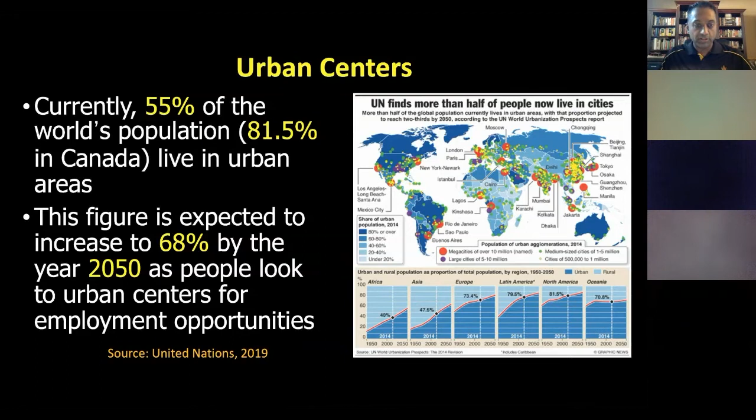When we look at urban infrastructure, where we are today took about 5,000 years, and we're expected to double this infrastructure over the next 35 to 40 years through construction. And from a design perspective, these systems minimally need to last more than 50 years. So we have to be creative in terms of how we do that. Today I'm talking about trenchless technologies and underground infrastructure, utilities, those types of things. A lot of our systems are aging. We have old pipes, a lot of places where we've got cast iron pipe that we're changing over to ductile iron pipe. We've got a lot of concrete and clay pipe in various stages of their life cycle, and we need to upgrade all of those.

Not only that, but we have capacity issues, and so trenchless technologies like pipe bursting are very important to be able to upsize the capacity. When we build a new subdivision and tie it into an existing system, it can't handle that kind of waste. So we need to upsize those and build new ones.

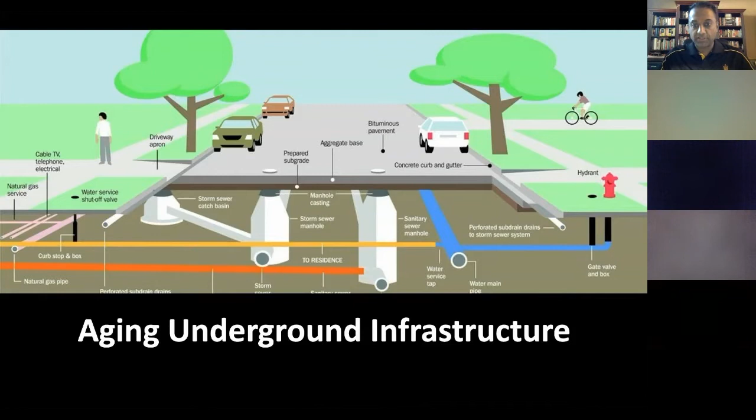And so what do we look at? There are a lot of owners out there, and from an owner perspective, you're looking at, is it economically viable? What does it cost? Can we do that? We look at natural resource conservation these days, more and more at the whole aspect of sustainability, and whether these technologies will be better on our natural resources. The social responsibilities as well, making sure that we have minimal disruption to surface activities and the general public, which is paramount in any kind of application. And then when it's operational, what is our efficiency in the operation of those systems? The process, the technologies, the people involved, how does it work?

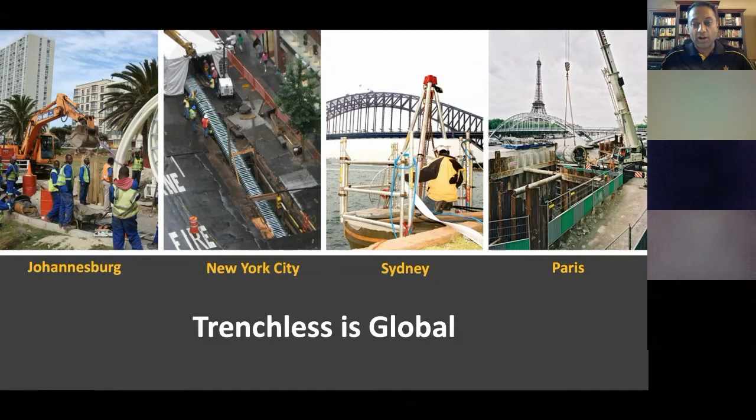And trenchless really has a global following. We're not just using it in Canada and the US, it's all over the world. When I was chair of the International Society, I oversaw trenchless activities in 40 different countries, and I spent half my time on United Airlines, traveling to many places to talk to governments and see what they're doing. This is just a snapshot of the global aspects of it. You can look at Johannesburg, South Africa. This is New York, Madison Avenue, doing a lining job. Sydney, Australia, and of course Paris, with the iconic Eiffel Tower in the background, is a microtunneling project across the Seine River.

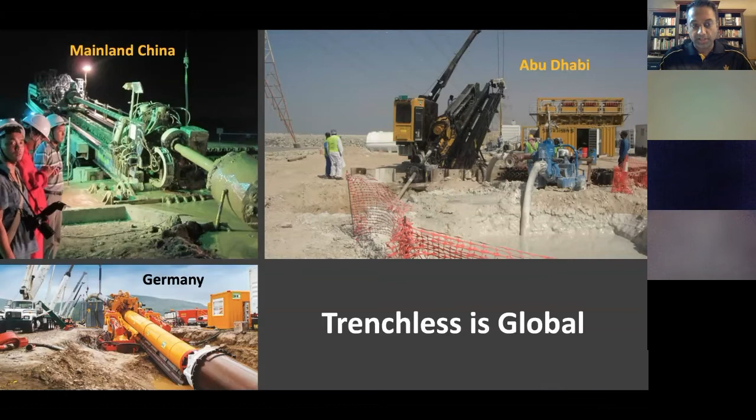Mainland China. So that picture of mainland China is a rig from China National Petroleum, and they did a 3.3 kilometer shot, not just one, but three 3.3 kilometer shots beside each other underneath the Yangtze River for oil and natural gas type products. So both of them. Abu Dhabi. Sometimes we're doing trenchless in the middle of the desert, and then Germany with this direct pipe. And I understand you'll be talking about direct pipe, which has really become more and more popular as a tool in the trenchless toolbox.

Well, as we all know, today we're in the world of COVID, and so we have to take precautions. And so where are we with trenchless with COVID? Well, I can tell you that as much as COVID has been a very negative from a health and a human aspect, one of the things that has come out is that we're doing a lot more remote working, and our kids are in school remotely. My kids at Arizona State University, I do teach live, but I have maybe 1 or 2 students that'll show up to class, and the rest of them are all remotely.

But we found that there's a lack of our IT infrastructure, and you see a lot of directional drills and trenchless applications for installing new telecom systems. Our 5G, it's a big race, and I can drive outside today, and I'll probably see 3 or 4 horizontal directional drilling rigs here in the Phoenix area that are putting in telecom systems to upgrade that infrastructure for telecommunications. But trenchless has been a boom.

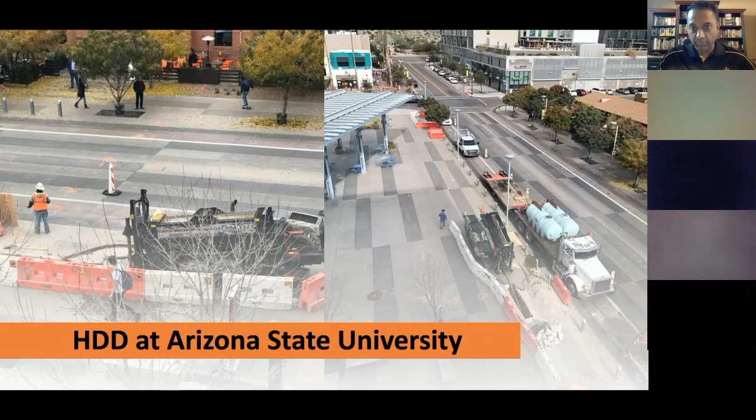This is a telecom. This was before COVID, and this is looking outside of my building at the university, and you can see they're installing Cox communication systems around campus and around the area. And you can see how minimal the disruption is with HDD. And so universities and public institutions are doing a lot of trenchless. We do lining on campuses and things like that as well.

And I actually arranged a trip for congressional staffers from the US government to come out one day. I flew out to DC and we talked about this so that at least Congress can understand more about directional drilling and trenchless, and how trenchless as a whole has a lot of benefits to society, because there's still a lot of people that don't really understand trenchless technologies and how these can really help with infrastructure and make life a lot easier.

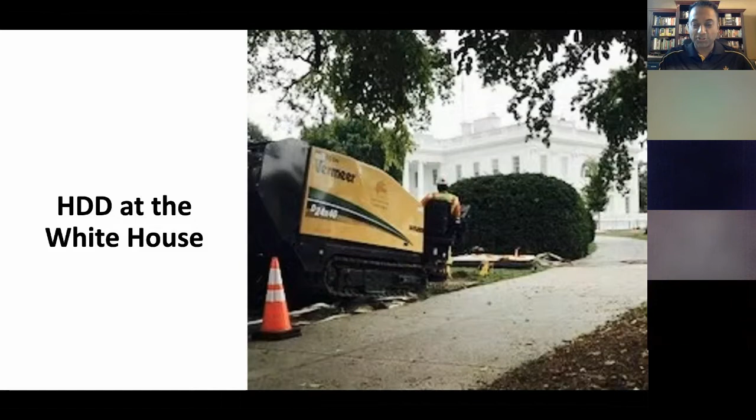But, we use it all over. I guess we have this election coming up, but this is an HDD project right at the White House where President Trump lives. And we do use these in all different situations. So I thought this was kind of an interesting picture. I can't really tell you what the application is, it's all secretive, but interesting projects as well.

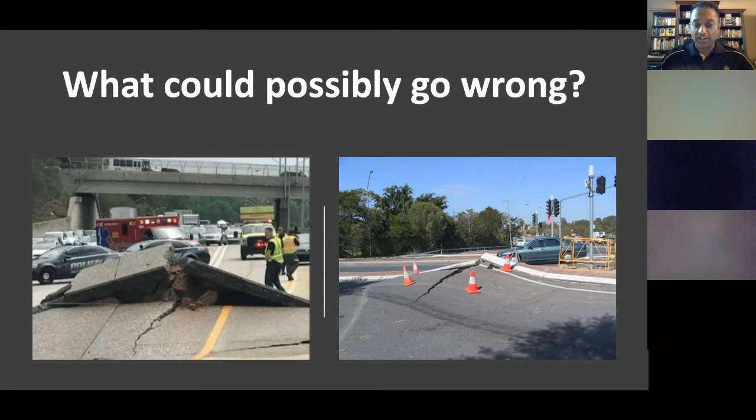Well, what can possibly go wrong? I mean, trenchless, what can happen? Well, these are all pictures of inadvertent returns or hydrofractures that have occurred with horizontal directional drilling. It's underneath a road, and all of a sudden you have a release of drilling fluids, and this can happen. So proper design, proper construction practices can really avoid this, because this is a litigation just waiting to happen right here. And so, is it the design? Is it the way the contractor drilled? What is it that could have happened right there?

I can't stress enough in any of trenchless, and this is related to horizontal directional drilling, but soils investigations obviously are where we need to start with any kind of trenchless operations. And I preach to a lot of owners and engineers that it's so critical to have that information even at the design stage, to know what depth should we be designing it to?

Should we get out of cobbles and gravels if we're doing HDD, get out of rock if we're doing pipe ramming? What kind of soil conditions are really appropriate for whatever trenchless method we're doing? And so having enough soil borings is really critical, or doing other types of investigations. We do geophysical investigations, many different things that could be applicable.

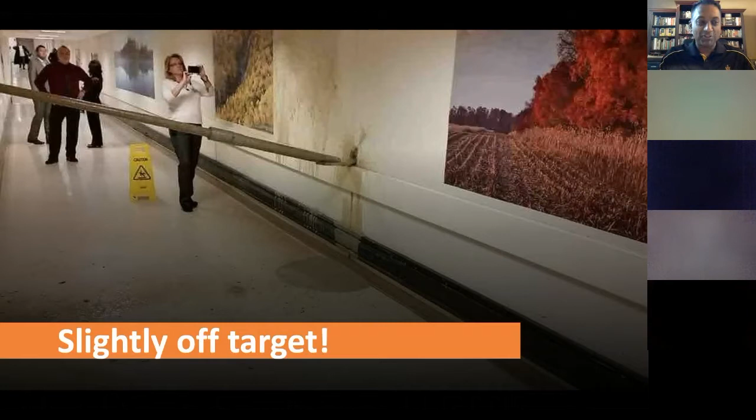Striking of utilities, and what gets a lot of attention are natural gas lines. When you hit a natural gas line, and I'm actually involved in most of the natural gas explosions that happen in the United States. I represent the gas industry, so I work with a lot of different gas companies.

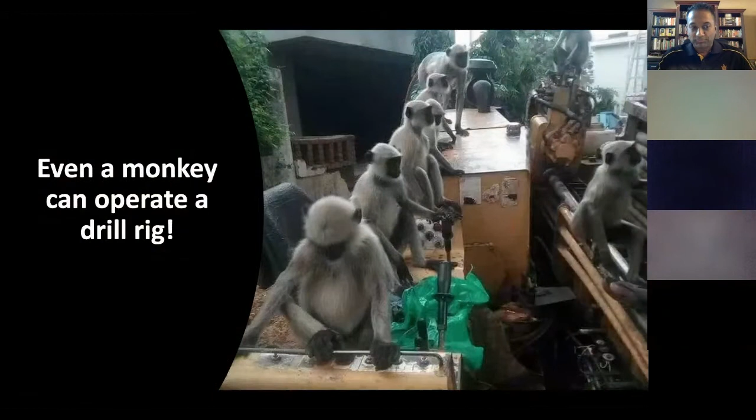So, can even a monkey operate a directional drill rig? Absolutely not. It's not the case of just anybody jumping on a rig or any piece of trenchless equipment. I focus on directional drilling because that's what I do most of my education and research on, HDD technologies. But you can apply that to any trenchless method. You can't just jump on a machine and start operating it.

Just like you can turn on a car, but if you don't know the rules of the road, you can't drive a car, right? My 12-year-old son can turn on a car, but he can't drive. And if anyone's interested, this picture was taken in Thailand of a bunch of monkeys that were curious of what this yellow thing was in the middle of their area.

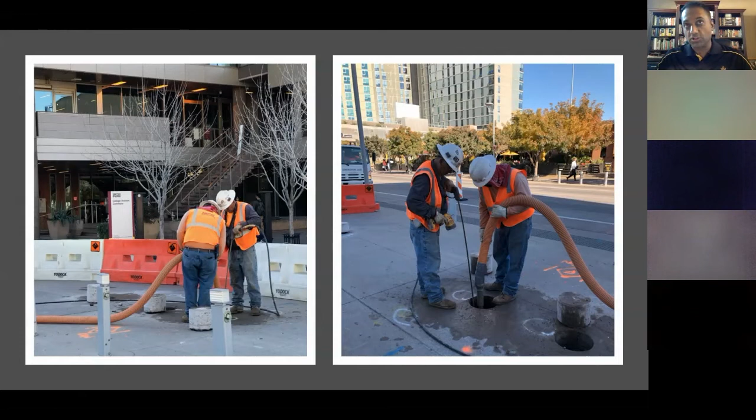I think it's also a good idea as design engineers to have these utilities located prior to your design, because then you know exactly where those utilities are and you can do a better and more competent design. What you don't want to happen is you just design a line and then put it out to bid. Contractor gets out there, they're doing the utility locates, and they find out that the design is intersecting or too close to some existing utility. So doing all that as part of the pre-construction or pre-design aspects can really be good to do as well.

So as a designer, you've got to understand doing your calculations, whether it's pull loads for horizontal directional drilling or jacking loads for microtunneling or any kind of jacking operation, your IRs or your inadvertent returns. You can do these, we call them frac out calculations. You can calculate your maximum allowable downhole pressures based on your soil conditions and your depths and your diameters and all of those types of things. And also looking at your minimum bend radius, from a designer perspective.

From a geotechnical engineering perspective, I've been on plenty of projects where they use geophysical surveys as well as soil borings, critical projects where you want to make sure that you have as much information of what's underground. And when you're doing those soil borings, and unfortunately I've seen them, if you're 20 meters deep, you don't want to do a soil boring that's 10 meters. You've got to go to that plus some, right? So we always recommend you exceed whatever the design depth is. But unfortunately, I do see that happening where they fall short of the design depth, and things can change a lot in those soil lenses as well.

Geologists I put in there, and geologists can provide a very interesting perspective of the history of the area. Some of you might be geologists, but you really understand how things were formed through volcanic shifting of the area, and that can really give you some other information on what the area was like.

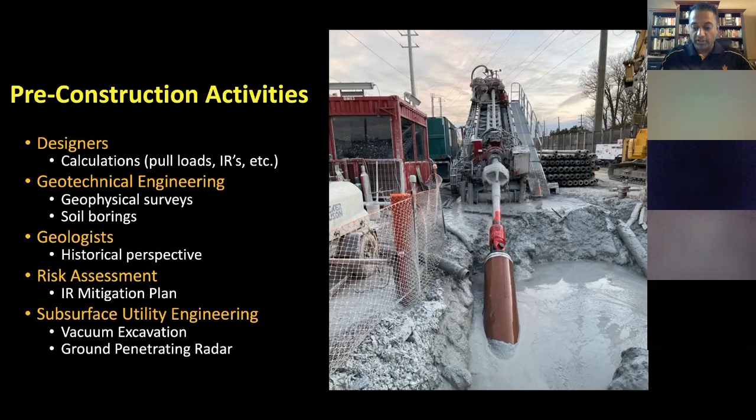And there are other electromagnetics and things like that that people use as well to try to classify and understand the subsurface utilities. And the American Society of Civil Engineers has a really good standard on subsurface utility engineering, the different levels, and what you would do in the various levels.

I'm a firm believer that experience is really critical for design success. What I mean by that is we don't do ourselves justice by having designers design projects who don't understand what the project is about. You've got to understand what you're designing. Back in the day when I first got involved in horizontal directional drilling, the people that designed HDD projects understood. When they saw the values, they could understand whether the values made sense or not, right?

And unfortunately, today, with much more trenchless activity, we tend to have very good engineers designing. However, they really don't have that field experience or really understand if this pull load makes sense, or if the maximum allowable pressures make sense, or even the design path. And that's where we can get into trouble sometimes with litigation issues from a designer perspective.

You do a design, and unfortunately, some engineers end up relying too much on some of these so-called black box solutions, where you just plug in some numbers and come up with a solution and don't really understand what they mean. And that can be a problem. And I'll give you a great example.

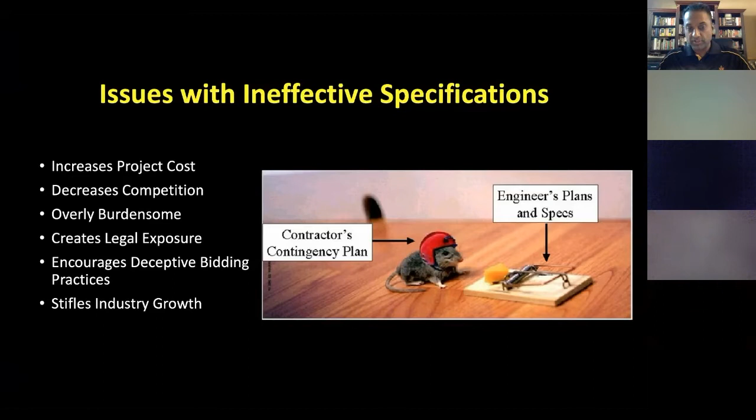And of course, deceptive bidding practices. A contractor saying, yeah, I know these specifications are wrong, I'm just going to bid on it, and then I'm going to have a change order. Right? That's what they're going to do. And that ends up stifling industry growth, because maybe an owner has a bad taste in their mouth because of a prior project. Many of you might have seen this one, but I still love it: the original contract versus the change order. That's sometimes what can happen on these projects if they don't have proper specs.

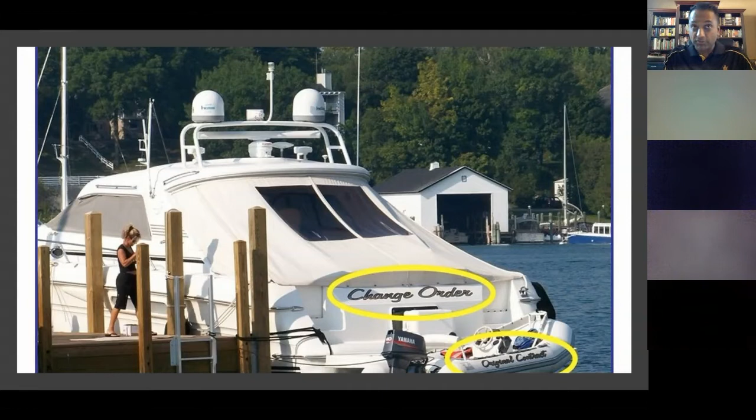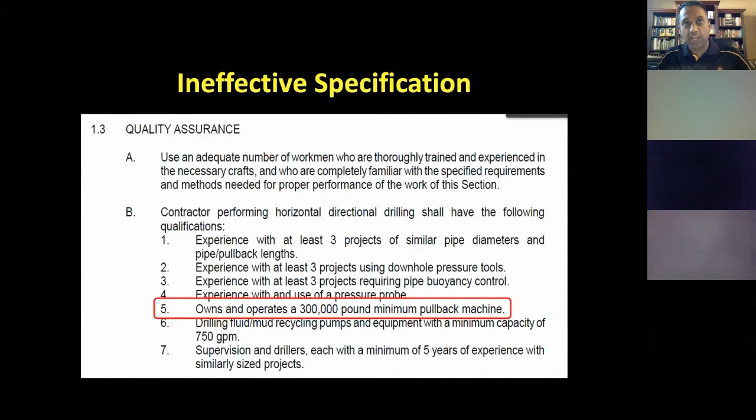So you look at that and say, wow, that's a pretty good specification. But it's got to be applied to the project. This project was to install 424 linear feet of 8-inch water pipe in an urban setting. You would never use a 300,000-pound machine. You don't need those mud pumping capacities. You don't need pressure probes and all these things for a project like that. So, in my opinion, that's negligence on behalf of a professional engineer to put a specification like that, because all that engineer did was take good documents from a pipeline-type project and apply them to this 8-inch water line. And this really did happen on a project in the Chicago area.

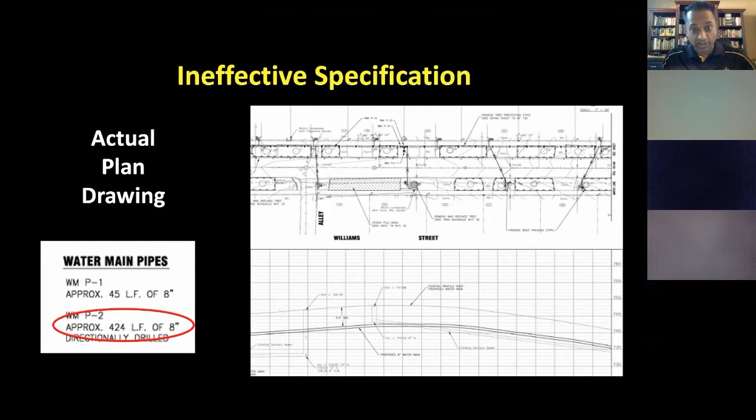Here's another one. If a release of drilling fluid occurs within a wetland or a water body, reasonable actions within the limitation of directional drilling technology and the contractor's ability shall be taken to reestablish drilling mud circulation.

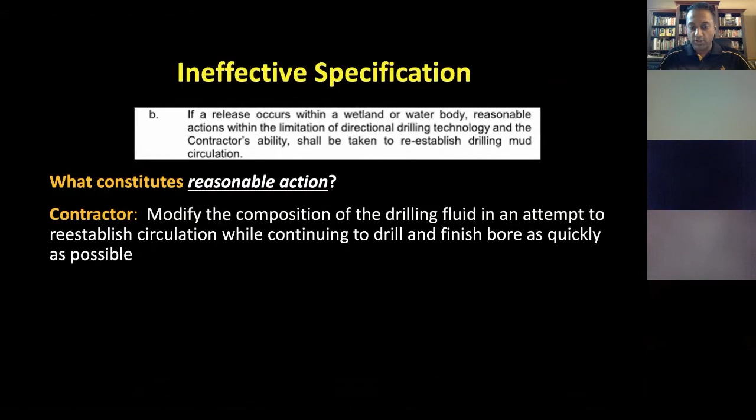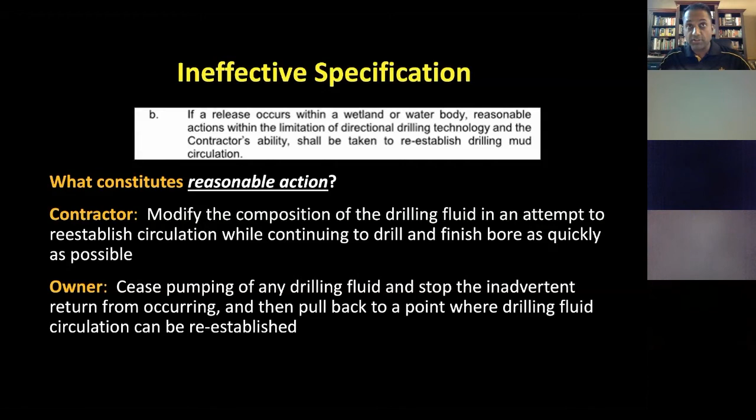That's what it said. But what constitutes reasonable action, right? A contractor is thinking of modifying their drilling fluid, trying to reestablish circulation and continue as quickly as possible. But an owner might look at it as, well, we've got to cease pumping of all drilling fluid. We need to stop these returns from occurring, and we want to pull the product back to the point where the drilling fluid can be reestablished. Two different things, but that's what the specification says.

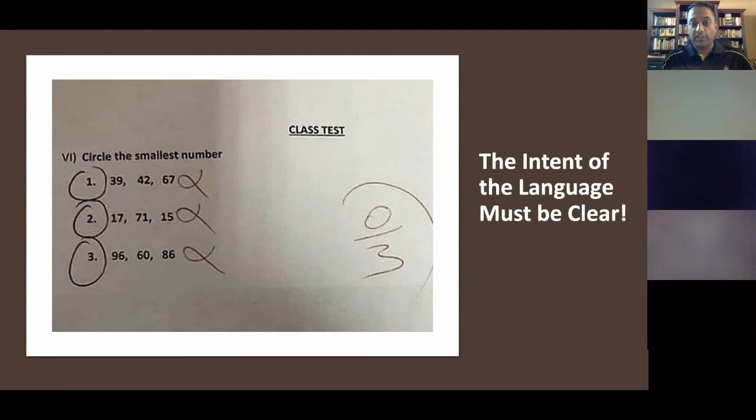The intent of the language must be clear, right? And so you've got to make sure, whatever you're doing, that it makes sense, because people are going to read it literally. And that's why the specification has got to be crystal clear in what you're doing.

Here's one. At the top, they're talking about after successfully reaming the borehole to the required diameter and pulling the pipe through. And then in the same section, they say, in the event of a drilling fluid fracture, inadvertent returns or returns loss occurs during drilling operations, the contractor shall cease operations immediately. So what it's telling me is that when I'm drilling, if I have an inadvertent return, I've got to stop right away. Well, what if there's a frac out during the pullback? Should the contractor just continue going? Because it doesn't talk about pullback.

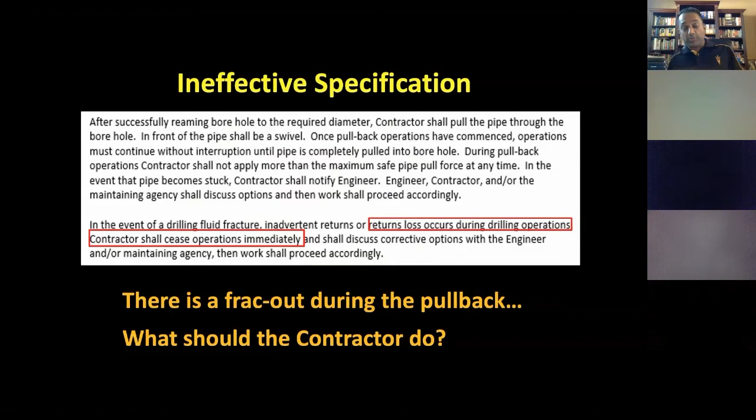It says drilling operations. And so I know what they meant. I think they meant to say that during drilling and pullback operations the contractor should cease operations immediately, but they just said drilling and were using it as an overarching term. But the contractor is going to look at it literally: well, I was drilling forward, I didn't have a frac out, I started pulling my product and I had a frac out. Oh, I guess they don't care, I'll just continue going. So that's something to really consider.

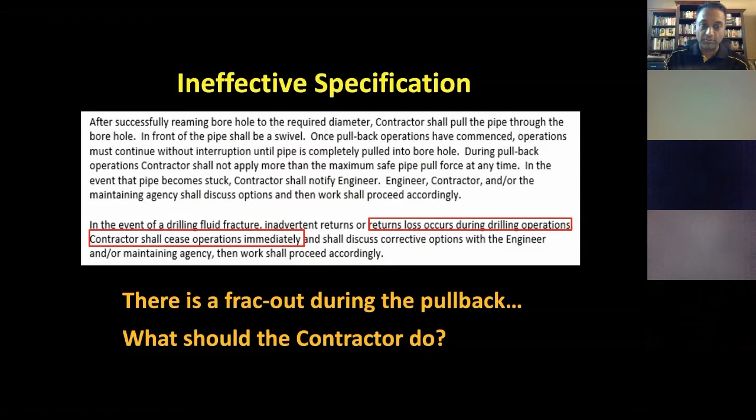So we actually classify it based on a small, medium, and large rig, and that depends on the diameter and the length of the project. So if you're doing a crossing with a long length, then yes, have an inadvertent return plan and have pullback calculations. But if I'm doing 60 or 70 meters of a small telecom conduit, I don't need to do all that. That's not really necessary. So we classify that in a table within the specifications that states, based on those parameters, these are the things that the contractors need to use.

So it's a single spec that can be used for any kind of horizontal directional drilling, and that eliminates that cut and paste issue, promotes safe working practices, reduces costs and the volatility of bid pricing, and effectively mitigates risks. That's available. Just go to the Maricopa Association of Governments website and look for Section 608, horizontal directional drilling, and feel free to look at it and use it or modify it for your projects if you wish.

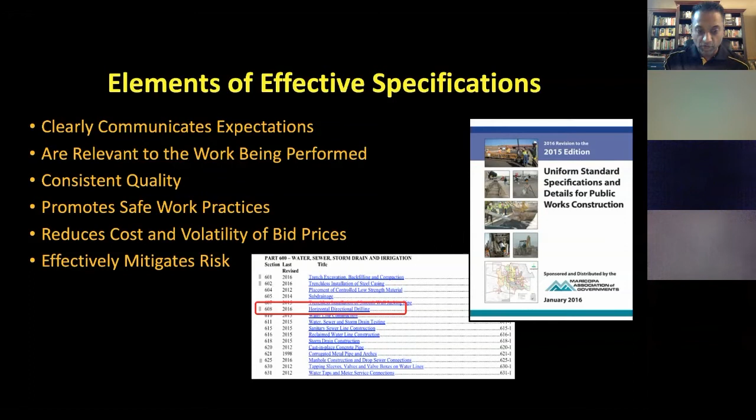I talked about litigation. When I was still living in Edmonton, I was involved in this particular lawsuit. I was flying from Edmonton down to Texas on this, and this was back in 2000, so almost 20 years to the day when it actually happened. But this is what happened. I represented telecom giant AT&T. They were in litigation against another company called Qwest, which is now called CenturyLink. This was the big fiber optics boom going on in the late 1990s and early 2000s.

The AT&T line was there, and the Qwest contractor drilled and hit the AT&T line. Then they set up again, drilled, and hit another line. So it went to litigation, and it was a jury trial that I testified in. The actual damages to the line were 1.2 million US dollars. That was easy to calculate. But the jury awarded an additional $350 million to AT&T for what they call the loss of use provision.

So they said, well, they were negligent, and I was actually there to demonstrate gross negligence on the part of Qwest, and that's what I did to the jury. I made presentations in that. Unfortunately, I just got paid hourly. I should have gone for a portion of the settlement, but regardless, litigation can be very costly.

I wanted to show you this. It's the largest HDD rig in the world, and this has a thrust pullback of 4 million pounds. Most of the rigs that you'll see doing jobs around here in North America are going to be about 1.3 or 1.4 million pounds of thrust pullback. This is a Chinese rig. A company a couple of years ago had a 2 million pound machine, but this is a 4 million pound machine that, as we're speaking today, is doing an installation in Fujian province in mainland China. And I actually have a research team out on the job site collecting data and looking at this project. I would be there if it wasn't for this COVID situation.

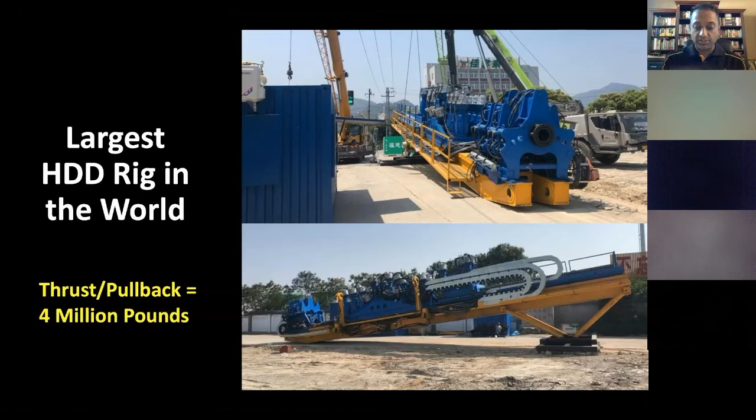And that's a lot of engineering, a lot of design involved to actually bring a project like that to fruition. Black & Veatch was the design engineer on that particular project. And right now there are projects being designed that are looking at over 6 kilometers of HDD. It's the science and the engineering that's really enabling us to continue on and do things like that.

I just wanted to end with one of our secretaries. She had a great application for recycling used tricone drill bits. Her kids are in the industry, and she made a table for her backyard using 3 tricone drill bits that had been used up. I would love to have a table like that in my house.

So just some concluding thoughts. Litigation may be avoided by proper design from an engineering perspective and construction from a contractor. We have to have both of them aligned to really have a good, successful project without litigation, which is the goal of any kind of trenchless project.

Training and education of all parties. It's not just the contractor, it's not just the engineer. They need to all be trained and have an understanding. And a good thing to do with your young engineers is to take those people out to a trenchless site. If you're doing lining, have them go out there and spend some time watching the lining process being done. If they're doing directional drilling or pipe bursting or direct pipe or whatever they might be looking at, get them to actually visually see that. I think that's really critical.

Prudent pre-engineering activities, as I discussed, are going to significantly reduce project risks and litigation. If you follow these good practices, you should have less chance of having any kind of problem go wrong in your project. And of course, one of my pet peeves is poorly written specifications. They're confusing and often call for nonsensical requirements. Like I said, they're just putting a telus line in. You don't need to do pullback calculations and frac-out calculations for something like that.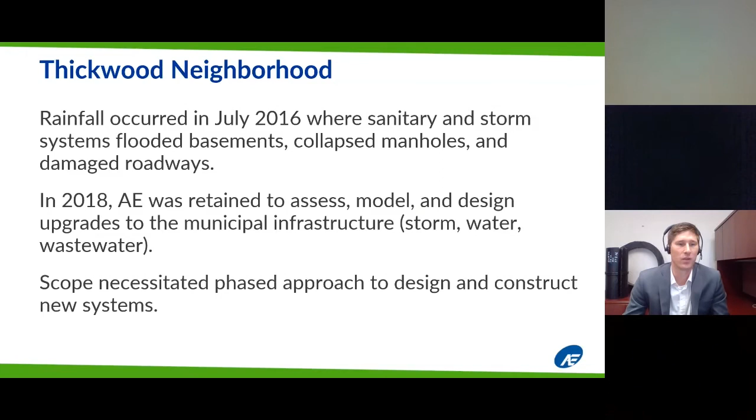I believe there were in total 7 phases. Right now we're working on phases 2 and 3, I believe, but this was phase 1. Obviously, you have to design from the lower end and build up, or else you don't have anything to push your new system to, and then you create a backlog. So this was in the lower portion of the project.

So this is kind of an overall Thickwood neighborhood. This was just one option sheet, but it does show the actual portion of the project we're talking about here today. And this is the outfall, the Athabasca River flowing to the north, the water treatment plant, and large green space, the river valley. And this is where the installation occurred, and basically carries on through the entire neighborhood.

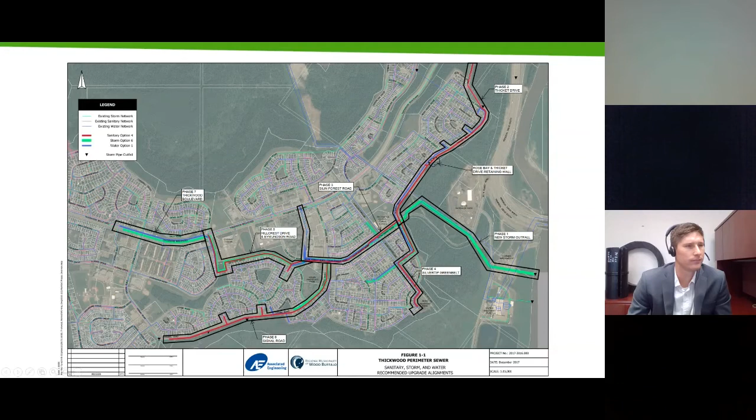So we go through the preliminary design options. Obviously, hydraulic modeling is a big component of the project to make sure that the entire system in the neighborhood works as one. In this case, the various options kind of necessitated a bit of a larger size between a 1200 to 1800 diameter. Now that obviously depends on the size and the slope of the pipe. So initially when we were looking at the more conventional open cut with some microtunneling, directional drilling, we were on the 1800 diameter. And the sizes did change as we came to a more focused and finalized design.

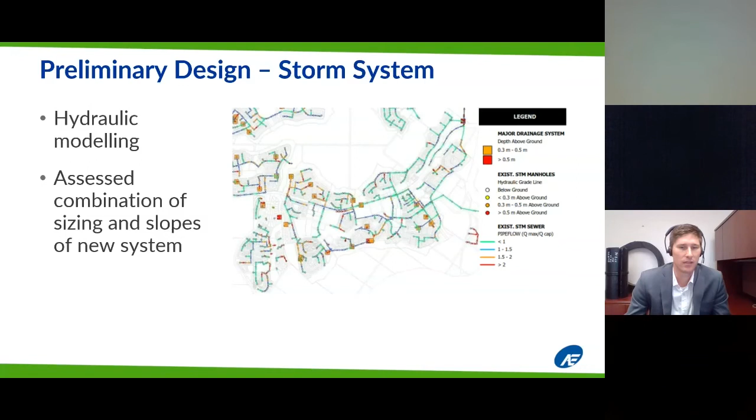So one of the early options we had was to traverse this unstable slope with a microtunnel. And so we'd microtunnel beneath into the limestone, the clay till, and underneath there's a significant amount of pipelines here, but it did include a significant drop shaft in just over 30 meters. And this was for a 1500 to 1800 diameter option. Again, the modeling was still kind of ongoing, and we still didn't have the final diameter just yet, but these were the options and the sizes we were kind of working with.

But one of the restrictions that we had was the client, the RMWB, which is understandable, prefers not to use drop shafts, and that's perfectly reasonable, but it does then push us towards a bit of a different option.

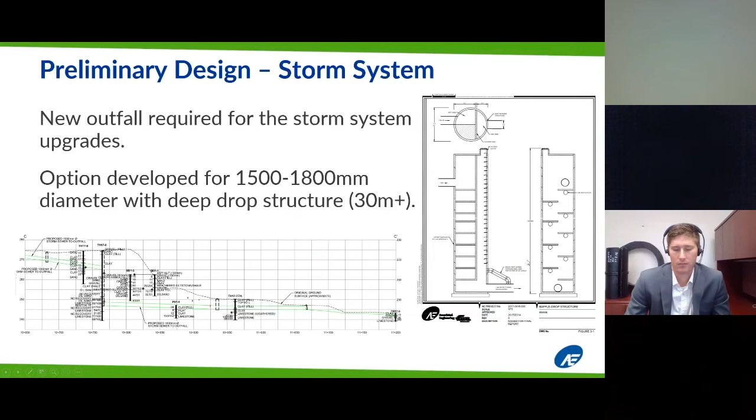Sorry, my computer is going backwards here. So

In terms of trenchless assessment, when you look at trenchless options, there are various obstacles that you need to almost create a list of. And as we were going through this project, there was quite a list. It includes unstable slopes, staging areas. Sometimes trenchless projects require a decent staging area, and we had to make sure we had that.

As we showed before, there were some large diameter pipe options, which increase the complexity, scope, and even just the workspace. The geometry and how the existing right-of-ways and the municipal land worked in this area, there was going to be some alterations, and there were some deflections here in terms of vertical and horizontal alignment we had to work with. And that made it a bit challenging in working with the options that we had going forward.

The large difference in elevation: in trenchless, typically you're working with slurry pressures, whether it's directional drilling or microtunneling. In general, slurry pressures are quite important to maintain and to manage, and in a trenchless installation, it requires some finesse for sure. The stratigraphy on its own, we went from clay till to dense sand, cobbles. We went through oil sand deposits and then through limestone. And this limestone varied in strength up to 100 plus MPa in some areas. So this obviously then creates even more complications in terms of machine selection and options and design.

So as I said, we developed two options: horizontal directional drilling and microtunneling. Horizontal directional drilling: the tight, complex geometry, the grade accuracy, stagnant water, and some of the safety risks that were involved. This progressed a bit further than the microtunneling option, but in the end, it was eliminated. Again, microtunneling was eliminated due to the deep drop shaft.

So as we were finalizing some of these options, we thought, what about direct pipe? It was an emerging technology. The first installation was completed back in 2007, so it is relatively new. But that's where we decided to start considering this.

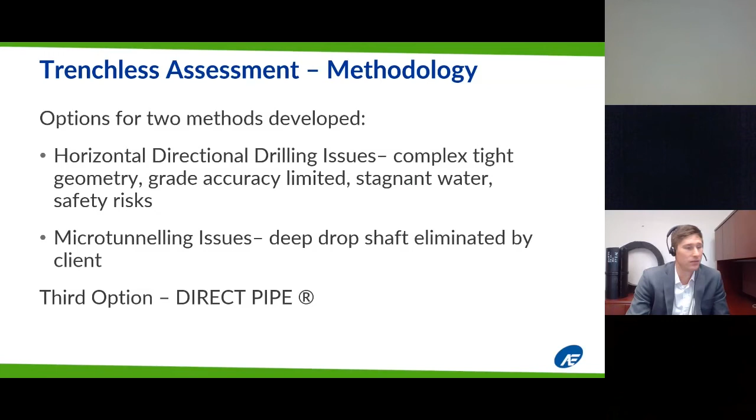So direct pipe design, I'll just go through a bit of what direct pipe is. It's a combination of directional drilling and microtunneling. Microtunneling in the sense that it is a microtunnel machine at the front. It is a Herrenknecht proprietary technology. There is another supplier in the US that is making things, but it's generally associated with the Herrenknecht name. But it includes a microtunnel machine at the front, as well as some supporting pumps and slurry systems in the sections behind it.

So typically what we'll see with microtunneling, you'll have a microtunnel machine with very few support sections, as they can typically put those pumps and things like that in the pipe behind it. But in this case, direct pipe doesn't allow for that. Like I say, microtunneling, directional drilling: when you directional drill and pull the pipe in, you do the best you can to have one full string, or at least a good length of pipe behind you to limit the amount of joining during the installation. So the directional drilling portion is actually having the entire pipe string laid out and connected behind you.

So the diameter, because of the microtunnel machine and the addition of a clamp, as you can see in the picture, what it actually does is the clamp falls over top of the pipe and is secured around it, and it has specialized plates that actually grab the pipe, and the rams, quite literally, as it's called a thruster, thrust the microtunnel machine, advancing along the bore path geometry you need. So the clamp really is one of the limiting features, but in terms of diameters, you can use between an 800 to a 1500 direct pipe assembly.

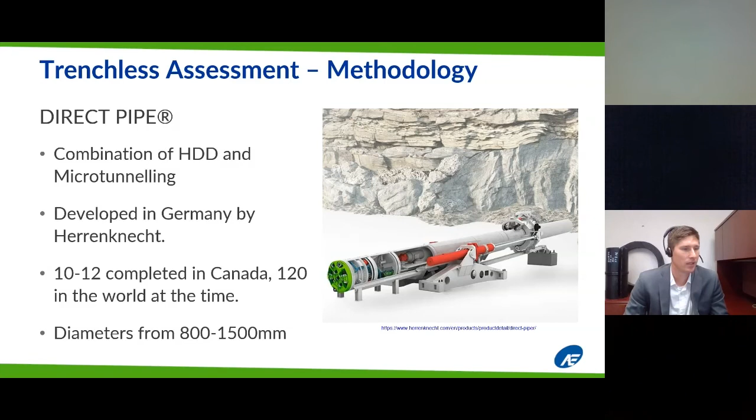So as I said before, it is a relatively new technology, and it does not have a design standard. The American Society of Civil Engineers right now is developing a manual of practice, which we're participating in. And so in this case, you rely on those who have done it. They have created quite a few papers in order to assess these calculations. And then we went one step further and had our own assessments done structurally with our structural group to confirm what we had come up with.

Direct pipe design, like I said, we used some paper references, but we also used the Pipeline Research Council International. They have an HDD spreadsheet, so we actually modified that to suit what we thought would happen and how the stresses would react. And like I said before, we did use finite element analysis to support the conclusions and calculations that we had been working on.

Now, one of the things in trenchless that is very important to assess is, is it feasible? I mean, we can put whatever we want on paper, but it is very important to get a contractor's opinion to make sure what you're doing is feasible. So at the time, there were 2 direct pipe contractors in Canada, and we did pass this by them to see what they thought was feasible. And so we worked with them. We came up with various plan profiles and options, and in the end, we did need to push the envelope a bit more in terms of alignment and grade and complex curves. But it did work out very well for us in the end.

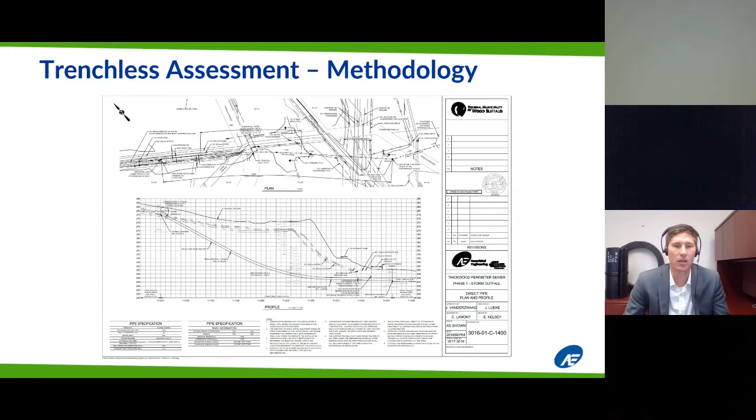So for the pre-qualification and tendering, we did pre-qualify. As I said, we had advanced the directional drilling option quite a bit further than the microtunneling option, but we did pre-qualify direct pipe as well as horizontal directional drilling, but we only tendered direct pipe. And then once tendered, it was awarded to Sureway Construction and Innovative Pipeline Crossings, IPC. They were the successful contracting team, and construction began in the fall of 2019.

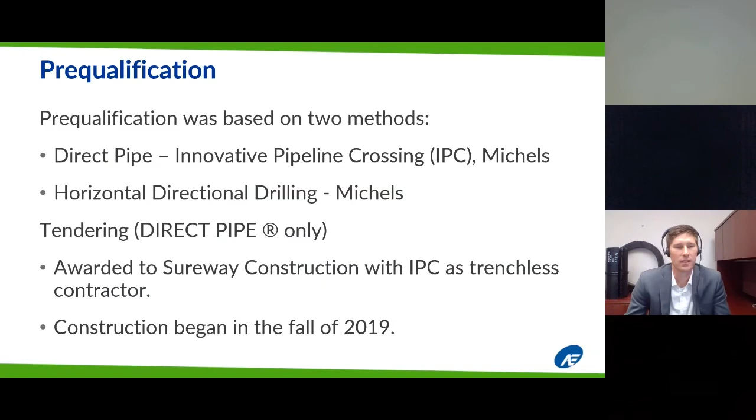So I'll just go through some of the construction. As I said, linings and coatings. One of the big challenges of the project, especially with the temperature as it was starting, you can see the color change. Linings, when they're done in a shop, are one thing, but as you do welding, you need to do field coatings, and you need to make sure they meet the spec for hardness and various pull-out strengths. So those are one of the challenges that we experienced, where the contractor did actually need to heat and hoard some of the pipe to make sure the curing occurred as it needed, to make sure we were getting the quality product we expected for the client.

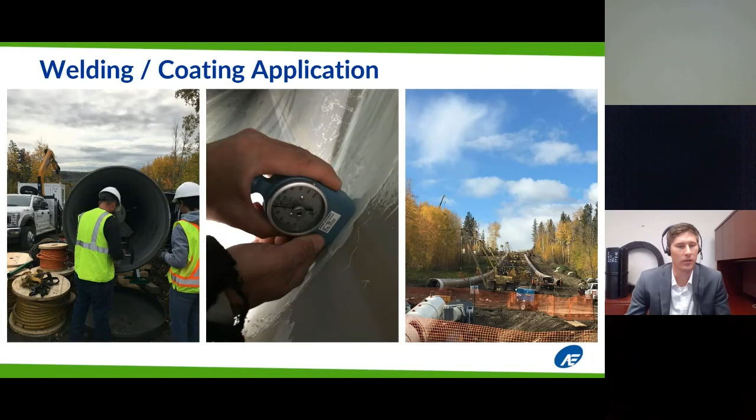So as the direct pipe equipment started to arrive, obviously having a thruster that can put 500 to 750 tons of force on a pipe requires quite a beefy structure. So what needed to happen was they used screw piles, various 12 and 14-inch diameter screw piles to place in the ground, and then secured their frame on top of that. And then you'll see at the beginning of this installation, they did include a casing pipe. That was to allow them to enter and use a proper slurry seal system, as you can see in the middle here.

Direct pipe uses a similar method as microtunneling, but it uses a significantly larger annular space, because in difference to microtunneling, direct pipe only has one location where they can lubricate from. With microtunneling, typically you have lubrication ports every 3 to 5, maybe 10 pipes or meters. In this case, there isn't that freedom. You have fins at the back of those microtunnel sections, and that's where the slurry comes out of. So it's very important to maintain that annular space to maintain a good lubrication.

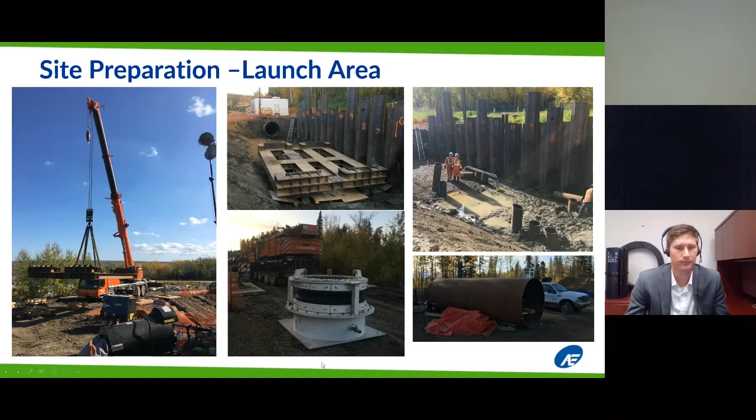So here is the thruster assembly coming to site. Those are quite large. This was a 750-ton system. It was brand new ordered, and placing everything, you can see all the sections being put together, and a very significant and large and heavy piece of equipment.

So as you have these large strings of pipe, you can understand that to get the slurry through them, you would need a significant investment in mechanical pipes, electrical systems. And so these continue through the entire string of the pipe, all the way back to the mud processing system. So on site, they had this set up, and so the slurry would go down these pipes through to the microtunneling system at the front, and then the microtunnel system would chew the ground, digest the material, and it would go back through another return line, and it's processed in this plant.

So it comes down, goes through the shakers, desanders, desilters, and is processed and then returned back. So all this material is pulled off and the system is recycled to limit the impact and use of water and mud and items like that. But everything has to go through these umbilicals: the communication, all the electronics, pumping power systems.

And in this situation, they did have 3 pumps that were inside the pipe. So it was quite a system. As you can see here, this is one of the pipes they're preparing to take down and get secured in place. That was one of the big challenges on the project, maintaining the pumps.

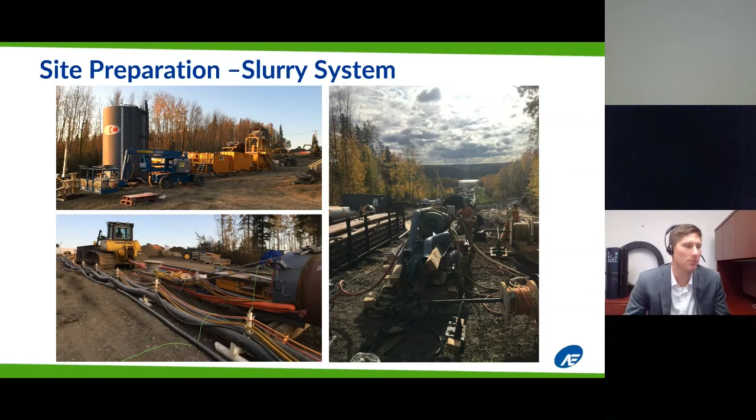So MTBM assembly, you can see here actually in this picture, this is where the lubrication ports were on this pipe, and you can see the significant difference and the annular space change, if you will, between the lead tunneling sections and the actual product pipe. And this turned out to be a 1200 diameter steel, 48 inch.

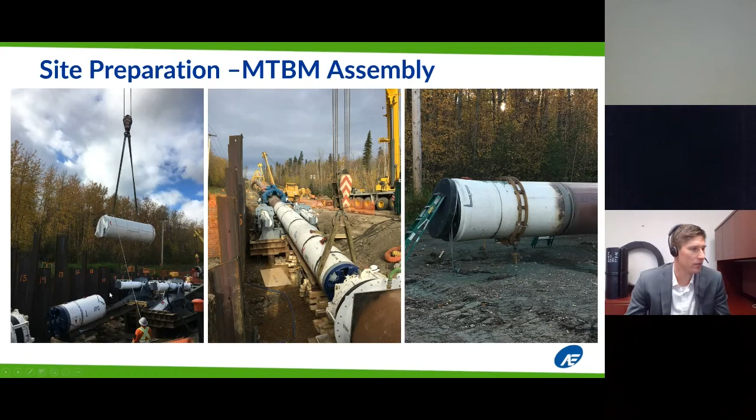And so this is as they're preparing to connect it, they connect it to the existing systems, and this is as we're preparing to launch into the steel casing. And so, sorry, the picture on the left is as they're preparing these sections and getting them in place.

So as you can understand, getting everything together in pieces is one thing, but then assembling all the connections is another. There are 3 people in here right now. Sorry, he's the 3rd, there's 2 others. And there isn't a lot of room. So going in there, bolting things, getting everything torqued to hold the pressures is quite a challenge.

And one of the problems we had was, as the gentleman was leaving, he accidentally kicked a valve closed. And so that caused a lot of problems because they need to use a crane to lift this steel plate on. So they had to get everyone out, seal it up, and then they found the slurry system wasn't working. So they had to take that plate off, and they just opened it up and found that they had accidentally kicked it. So it can be very finicky, and it does take a lot of preparation time to make work. But it is quite a fast methodology once it's working properly.

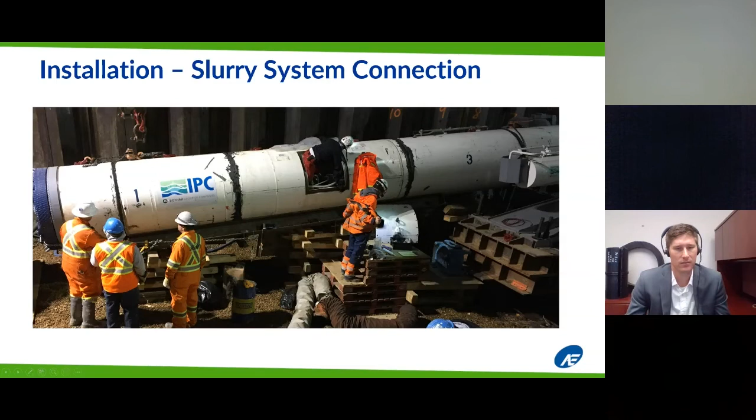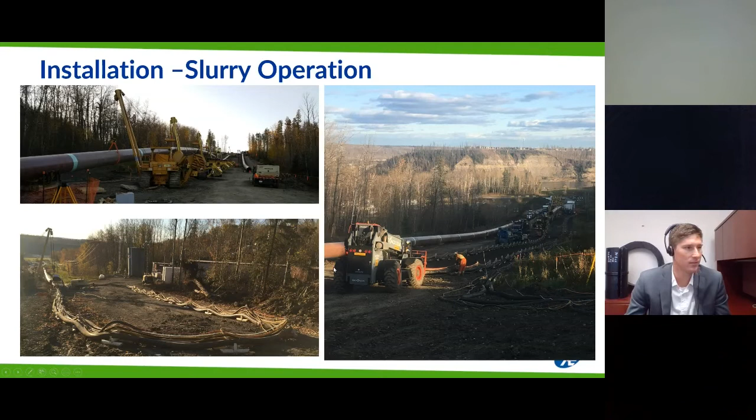So you can see his feet, he's just right behind the TBM, getting all the control checks and everything like that. And as the installation progresses, you can understand that all of these lines move with it, and you need to make sure you have enough slack to take the advancement. It is quite a process to manage and make sure you have proper lengths.

The grade criticality I mentioned before is very important. And what happened during this installation was we had certain grade tolerances you had to meet in terms of separation from the existing pipelines. And then the elevation at the end was set at plus or minus 30 to 50 mils, I believe.

And to do that, you have to actually have survey stoppages where gentlemen go down on what they call the pipe Porsche. This is a cart that rides on these rails, and they go down and they do this tunnel control check. And I believe they did 2 or 3 of these as they were going, and they would stop and send them down. And this operation continued 24 hours a day. So survey, obviously, we ourselves do tunnel surveying. This is surveying on the next level, very, very confined space.

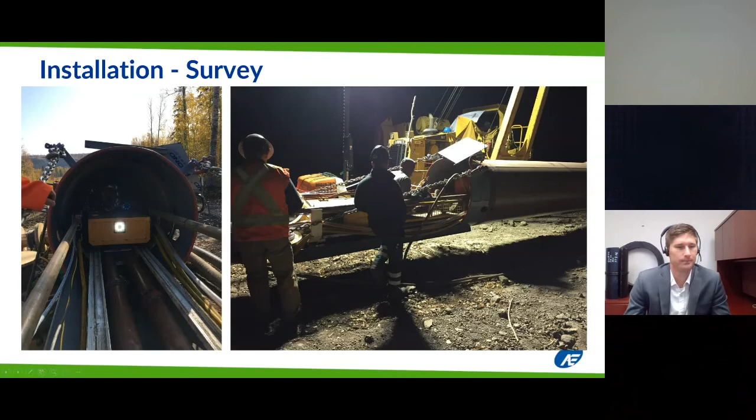And then once the first installation is complete, in this one we had 2 pipe strings, as you saw in the previous pictures, and you have the golden weld. We couldn't string out all 470 meters at once, so the first installation was complete, and then they moved the second pipe into place, completed the golden weld, and had that prepared.

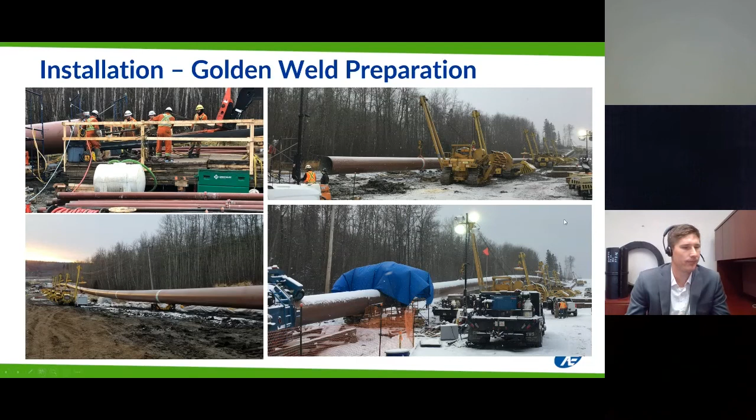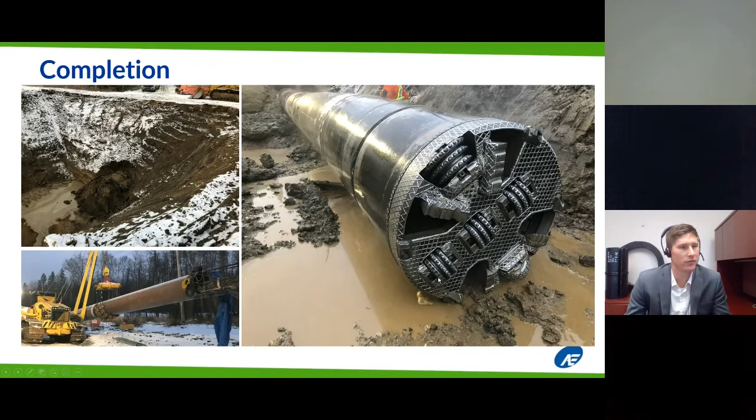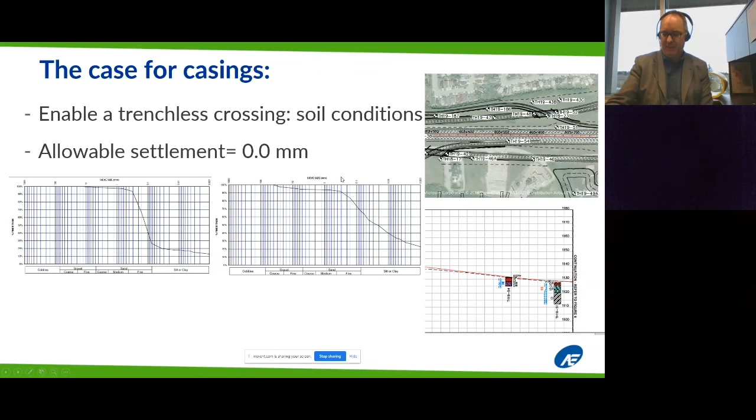So in this case, we need to install some sort of a casing, and we need a trenchless technology that's not going to provide any settlement, because Alberta Transportation said there can be 0 millimeter settlement on the road. This one might be on the quiz, by the way.

Okay, and another case for casings is to facilitate pulling the carrier pipe out. So the City of Calgary likes to have that option, and they use it on their water mains quite a lot. Up in Fort McMurray, I was talking to my colleague who's an engineer for Worley Parsons. They also use it when they know that the carrier product is abrasive. So let's say you're carrying something with a lot of sand in it, it's going to erode instead of corrode, and you want to be able to pull it out in the future.

So there's a couple times when people do like to put in casings for those reasons. They say that they're going to have to take this thing out at some point in the future. And if they do use that strategy, just keep in mind that you have to have some laydown area at one end or the other in order to facilitate this. You can't shoehorn this in some area.

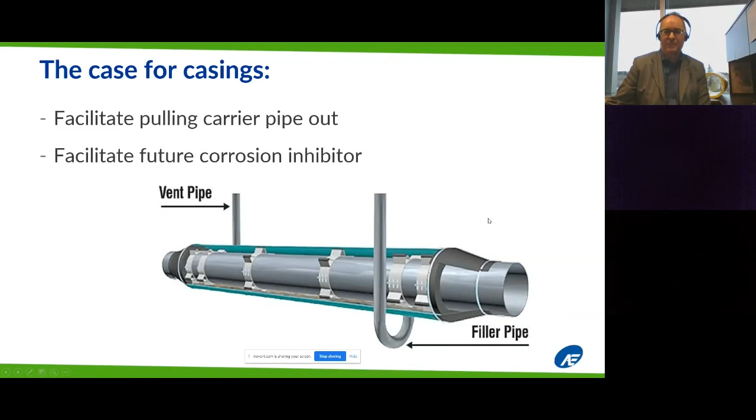Okay, so in the case of Alberta Transportation, they use it because they don't want any pipe leakage under their highway. They're focused, of course, on the roadway. And this is just a sketch that Associated has put together that sort of summarizes all the different 4 manuals that Alberta Transportation has on if you're crossing with a power line or a telecommunication line or a gas line, how you should do it.

So what they want, if you are using a jointed municipal pipe, like a water pipe, maybe it's PVC or ductile iron, and it has a bell and spigot, you've got to put it in a casing. And here's the dimensions you need to use. Here's the lowest depth of cover under the highway that you need to go with.

We've also got some power lines on here. They talk a lot about the clear zone. Things have to be pushed back outside the clear zone. That has to do with the velocity of the cars going by, and if they did lose control and go into the ditch, how long it would take them to get back, and what the distance is between the edge of the lane and whatever they don't want to hit, of course. So we use that statement quite a bit.

Just an interesting thing, the depth of cover on a water line or any of the other lines, it's not based on, let's say, the frost level. It's based on the kinetic energy of a vehicle coming off and crashing into, I guess, this ditch, and how long it would take to dissipate that energy. And I just found that out a little while back.

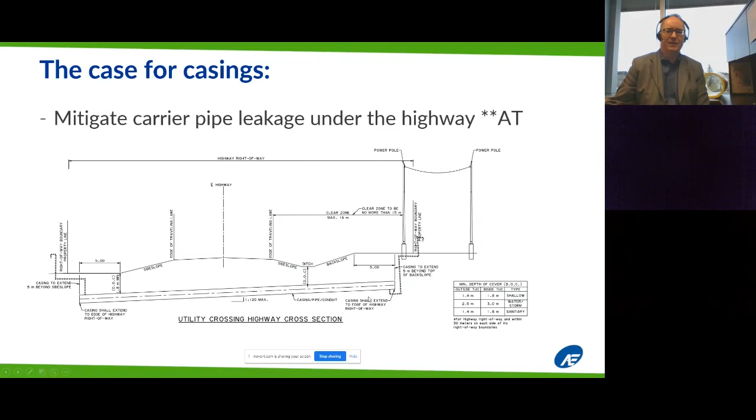Okay, so the case against casings. Sorry, there's a pun there. Again, they're quite expensive to install. When they installed casings on the City of Calgary's 900 feeder main at Valley Ridge as part of the West Calgary Ring Road, it added $1 million to the project, that and some other requirements that we needed to do. So they're not cheap, of course.

They're hard to maintain, and I just want to thank Steve King for having a chat with me. We had a chat about why the city uses casing sometimes, and so thank you for that, Steve.

This is down at Edworthy Park for those who live in Calgary. I don't know if you can notice this, but this is on an angle. Somebody hit that with either a lawnmower or a snowblower or something like that. There's another photo of this in a second. This is for a gas main that goes through there, but you can tell there's a casing there. Someone's nailed it. So these things get hit.

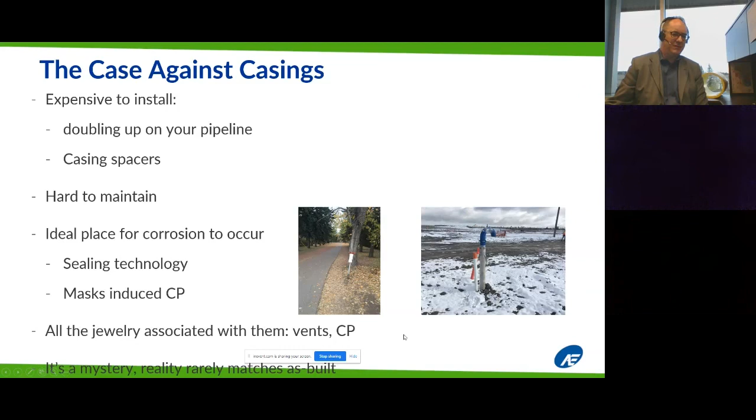And finally, I don't know if you can see it at the bottom of the slide, but it's a mystery. We've had the as-builts. I think Sam talked about that. Usually by the end of a project, the money's run out, so the engineering company doesn't want to spend a lot of time on as-builts. So they don't give you as-builts, they give you as designed. And we had a few surprises actually on the West Calgary Ring Road. Okay, and here's something I took off the internet. Cased pipe segments could be less safe than uncased segments.

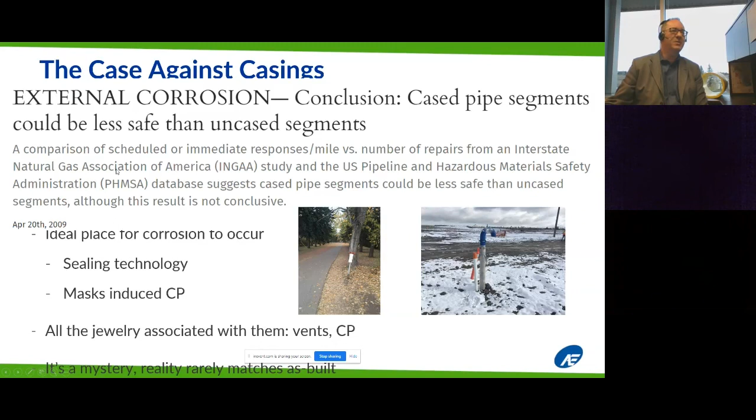Okay, so implementation, really quick. Sorry, this isn't a municipal drawing. This is once again at Edworthy Park, and this is what a cased crossing looks like. All the pipeline companies will have these wooden things up. So when you're done listening to me today, you can drive around your community and you can find these all over the place, and you'll say, "Oh my gosh, that's where a cased crossing is." And thank you, Tom, for showing me that.

They have these markers, and they also have, this is the vent, and what they actually are supposed to do is take a pipe wrench and unscrew that and put a dipstick down there and see if there's water in there. And if there's water in there, then the question is, what do you do about it?

Okay, but for municipal utilities crossing a highway, if it's PVC bell and spigot, or ductile iron bell and spigot, it's got to be within a casing. And the province doesn't allow fusible PVC on their projects. If it's jointed, the casing has to be seamless, and you need the casing spacers and the joint restraint for those bell and spigots. You need the seals, and you need some cathodic protection.

And the question is, different folks will talk about, well, what am I designing my CP for? And the province will say for 50 years, and some will say for the life of the pipe. And my concern is how you actually figure out how many anodes you need and where you put them. If it's jointless, you don't need a casing. If it's thick walled, you can go to CSA Z662. It'll tell you what size casing you need.

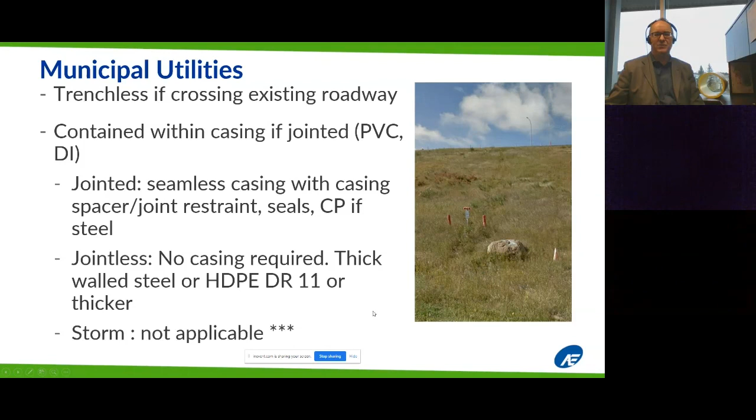And I just want to stop here for a second because I've seen a couple cases in my career where storm systems have experienced non-plan events, usually where you're draining off a hillside with maybe 20 meters of difference in elevation, and it's draining to a system down in the flats, and you get a hydraulic jump happening. And I don't want to say it's water hammer, it's probably air hammer, where I've seen some damage done to the piping system. So if that happens to be under a highway, maybe you should start the conversation on whether you need a casing for that storm as well. So that would be a third reason, unplanned for operational events.

What does Alberta Transportation say? We talked about this. It's got to be DR11 or thicker. Their text. I know, Sam, you have an issue with some spec text. In the original text was DR11 or higher, which someone could argue was DR17, which is actually a thinner wall, of course. So we always like to scrutinize what we're actually asking for. They'll talk about the depth of cover and where you can put your vents. Like they plan for this railway to be expanded, I guess, at some point.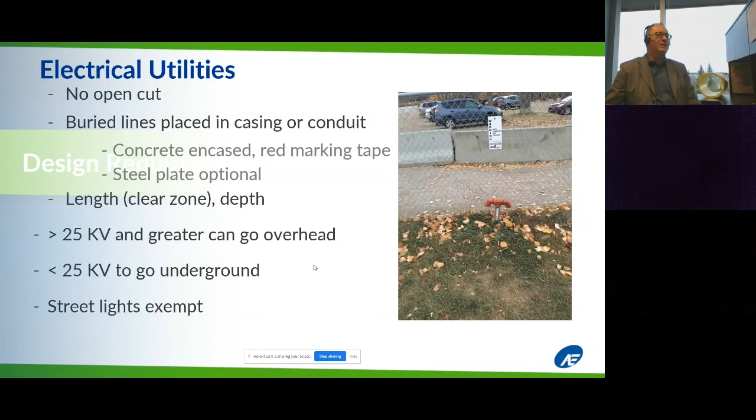We talked about the clear zone and how far back your poles have to be. This is sort of a rule of thumb. If it's 25 kilovolts and greater, it can go overhead. If it's less than that, it has to go underground, but it's very expensive to go underground with high voltage power lines, and street lights are exempt from that. So, okay, we've talked about this cross section before. I won't get into any more detail. This just sort of summarizes the requirements in the 4 documents that Alberta Transportation has, and you can get those on their website.

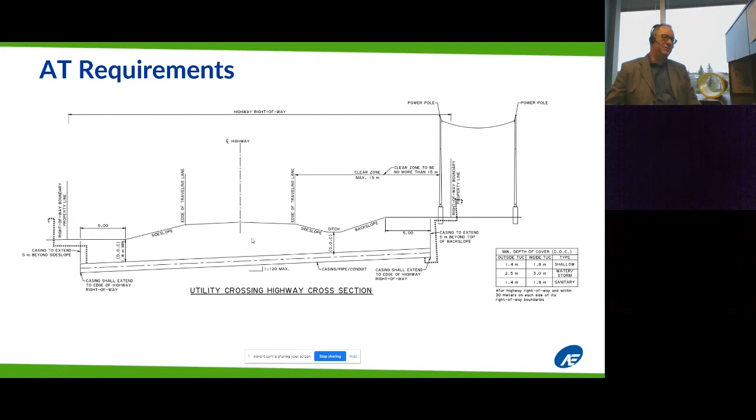Just some of the requirements, your casing, it has to last for 50 years. So I'd be interested, I'm not a cathodic protection expert, in how someone determines how that's supposed to last 50 years or match the life of the pipeline. Well, what we know now is pipelines are becoming like B-52 bombers. They seem to be able to last forever if you properly maintain them. So there's a little bit of an asterisk there on what it means to match the life of the pipeline. Has to span across the entire highway.

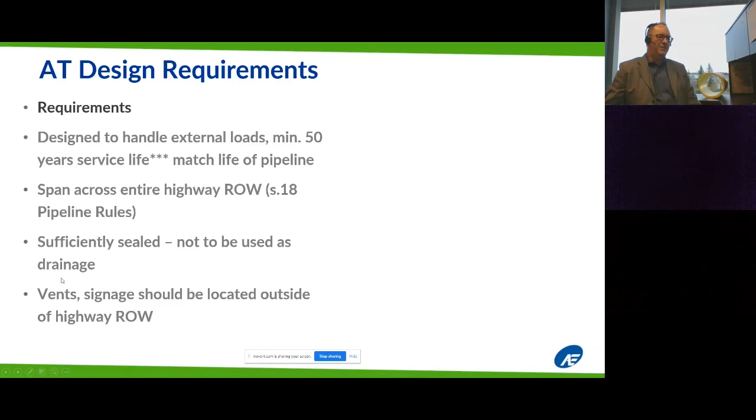I still think we're struggling to find sufficient seals for them. And the vents and signage and all that stuff has to be pushed outside the highway right-of-way.

Okay, let's do some case studies and we'll wrap it up real quick. Everybody ready now? Here we go. Okay, so the first one, I may have talked about this. We want to get some electrical and communication infrastructure across the Trans-Canada Highway. They often share what they call joint use crossings and joint use poles and what have you. No settlements allowed. Whoops, look at that, sugar sand, poorly graded. It's not going to hold up as you're moving. An attempt to cross to the east using an auger bore failed.

So here's a cross section. You can see they also want to put a big ramp on it. I don't think I mentioned that in the previous one. The soil's not very good with respect to if you were to just HDD it perhaps without a casing. So do we go casing or no casing? Okay, there we go. So that one was a casing. Hopefully that was straightforward. And if you have any questions about these, just contact me offline and we can have a chat on where our thinking took us to.

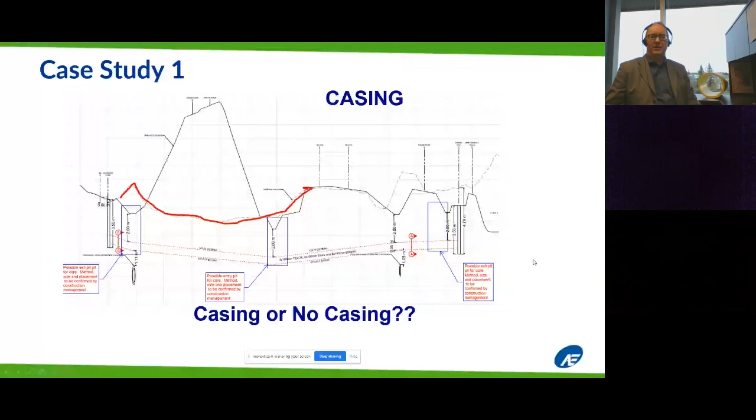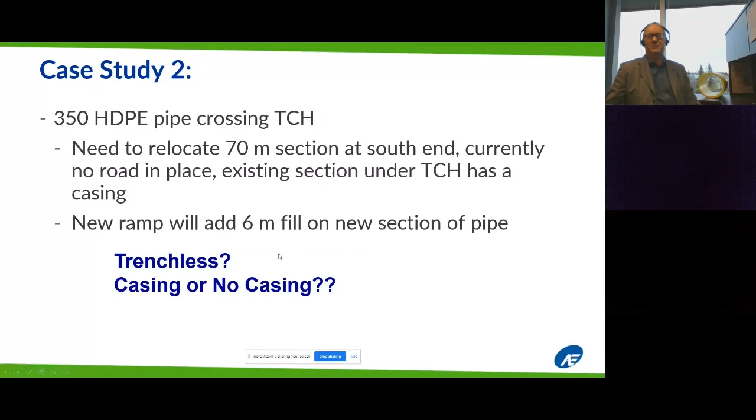Case study number 2, we've got a water line. It's jointless, so arguably it does not need a casing to cross the highway, but we need to relocate 70 meters of it at one end because there's going to be a ramp there, and the ramp's going to add 6 meters of fill. So first of all, does it have to be trenchless? I'll just say no, it doesn't, because there's nothing there right now. They can open cut it. And do we need a casing or no casing? Well, here it is. I know the drawing looks a lot the same. Excuse me for the noise.

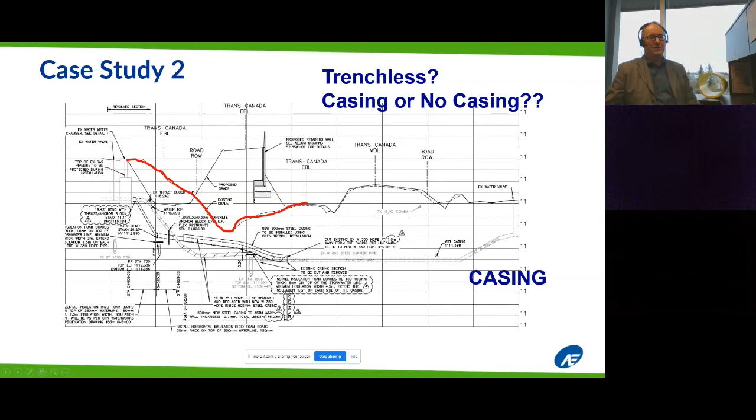The existing water line goes like this. They're going to raise it up. It's got a big ramp that's going on top of it. So do they need a casing or no casing? And of course, the answer is they needed a casing because of the extra load. The regulations are very adamant that the casing has to take the entire traffic and soil load. You can't adjust some of it to go on the pipe. The City of Calgary also wanted this casing to be gentle, so that they could pull out the pipe if they ever needed to. So that's where it follows a nice curve here. You can see when they installed the original one, they didn't realize there was a storm sewer right there, and they had to do this dipsy doodle on it. That's talk for another day.

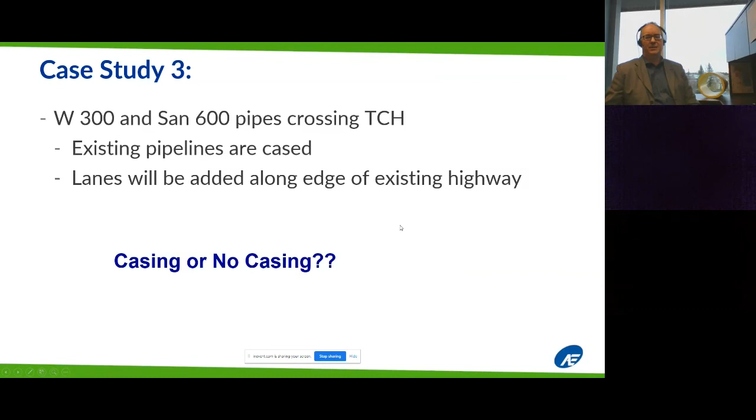Okay, we've got a water line and a sanitary line. They're both jointed PVC. They're cased. They're going to add lanes on each side. Do you extend the casing or not? And the answer, of course, is you extend the casing. Okay, I hope you're at 100% now.

Here's an interesting one. It was a water co-op, and they had a 250 steel raw water line. It was built to oil and gas standards. It was welded. We've got to lower it because there's going to be some grade changes on the south side, and we didn't think it had a casing. That's a little hint, or maybe it's a red herring. So do we need a casing or no casing? Keep in mind it's jointless, it's steel, and the answer, of course, is no casing. But then when we got in there, we found out that it actually did have a casing, and that goes back to as-built drawings, but we just plugged off the casing and continued on.

Okay, we've got a couple more. This is a storm line, 750, steel. Do we need a casing? How about if it's corrugated steel pipe? How about if it's jointed concrete pipe? It's a storm line. And the answer is no casing. And we talked about, well, maybe you need to scrutinize this more when you've got a huge uphill area draining across the road through a jointed pipe.

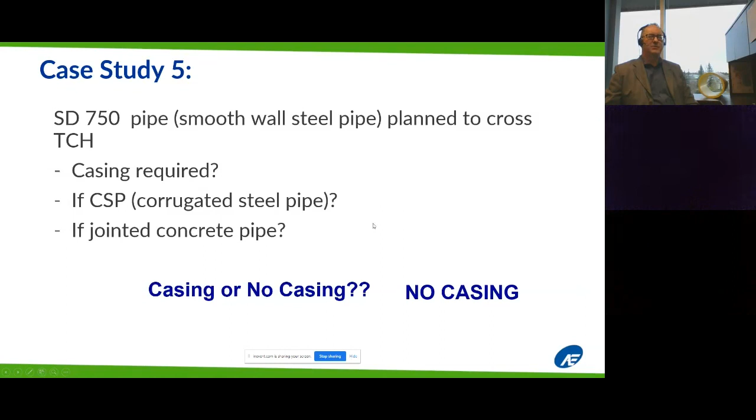Case study 6. We've got a PVC one. A developer wants to cross the highway with PVC, or maybe HDPE. It depends basically on what they do, and depends on if it's PVC. When it crosses under the road, it needs a casing.

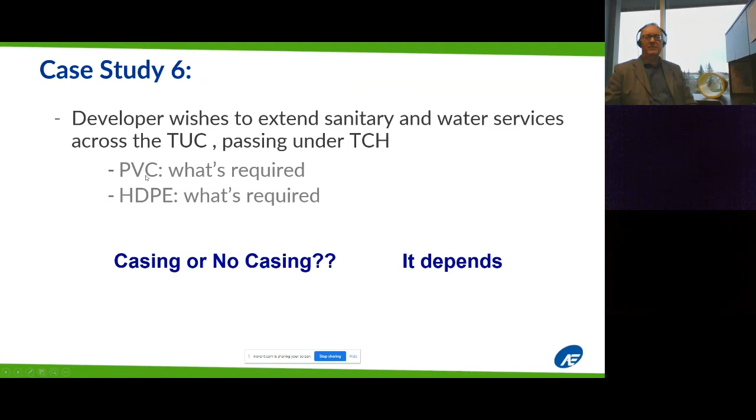Okay, this is the last one, and here the City of Calgary was relocating its 900 feeder main under the future Stoney Trail. It's steel pipe. It's fully welded. But it's pit run gravel soils and it's a shallow bedrock. So do you put in a casing or no casing? And the answer is casing. And that's it for my talk today.